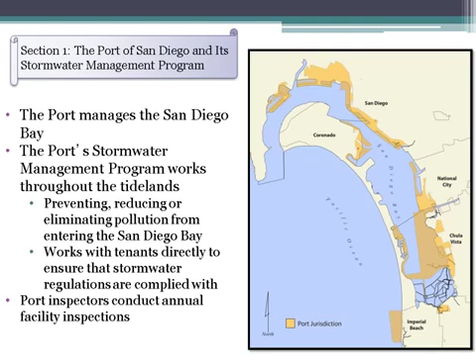Section 2: Stormwater 101. Did you know that the sewer and the storm drain system are two separate drainage systems? We'll start with the sewer system first. The sewer system pipes take all the water from inside a building, like from toilets and sinks, and drain the water to a treatment facility where it is treated and cleaned before being released into the ocean.

The storm drain system, on the other hand, collects all the water from outdoors, such as rain and other non-stormwater discharges, also known as urban runoff, and sends it untreated to oceans and waterways. Since there is no treatment, things like trash, pollution, pesticides, pet waste, bacteria, and other hazardous materials also get carried into storm drains. Everything that goes into a storm drain doesn't just disappear.

If you follow it, you will see it in the oceans very soon. That's why it's so important to prevent any type of discharge and debris from getting into storm drains.

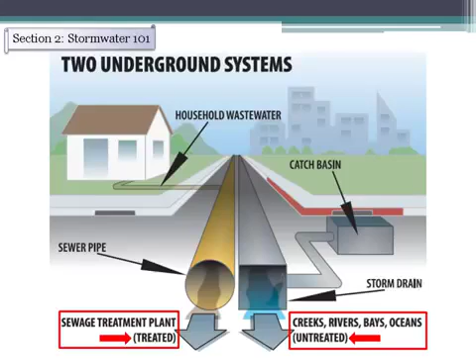Urban runoff is considered the biggest contributor to coastal water pollution. Heavily polluted urban runoff that enters storm drains can result in a variety of issues, including beach closures and drinking water contamination. This can put a community's health and natural resources at risk.

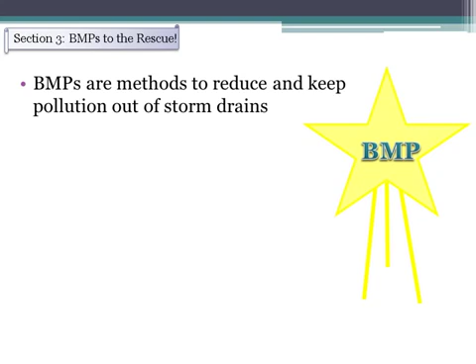Section 3: BMPs to the rescue. The amount of pollution in waterways and oceans can be minimized when people follow pollution prevention actions, such as disposing of their trash properly. Best management practices, or BMPs, are pollution prevention techniques for stormwater. BMP is a term used in the stormwater field, referring to techniques or activities selected to reduce and keep pollution out of storm drains.

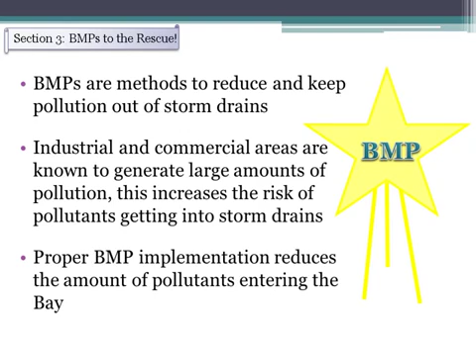Industrial and commercial facilities are known to generate large amounts of pollution. This is why the use and maintenance of BMPs is critical, as it allows for a reduction or elimination in the amount of pollutants entering storm drains and neighboring waters.

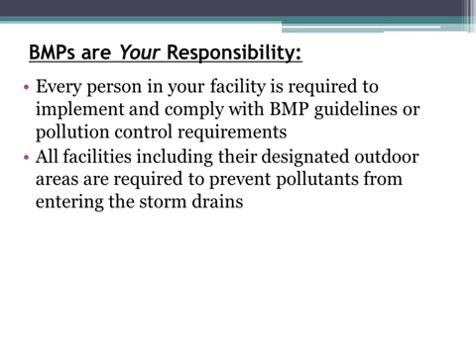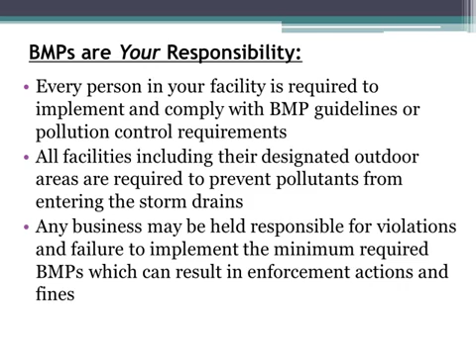Did you know that you are also responsible for BMP implementation and maintenance? Every person in your facility has a responsibility for complying with BMP guidelines or pollution control requirements. All facilities, including their designated outdoor areas, are required to prevent pollutants from entering the storm drains. Any business may also be held responsible for violations and failure to implement the minimum required BMPs, which can result in enforcement actions and fines.

Now that you have had an introduction to stormwater protection, we'll dive into the list of minimum required BMPs that must be followed at your site. The General Operations and Housekeeping section consists of measures designed to keep your facility clean and properly maintained.

Conducting routine inspections of BMPs and stormwater drains means checking as often as needed that BMPs are constantly in place and functional at your facility. If you notice a BMP that is constantly lacking every time you inspect it, it may be time to increase your routine inspection of that BMP or fix how that particular BMP is being implemented.

General housekeeping BMPs also include keeping outdoor areas neat and clean while sweeping to control for dust and debris so that trash does not get carried away by wind or rain to nearby storm drains.

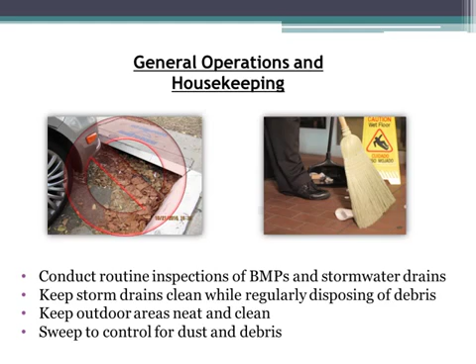Non-stormwater management BMPs are BMPs that prevent non-rainwater discharges from getting into storm drains. These BMPs include having spill response materials available at the facility in case spills do occur, and making sure to clean and sweep up the spill immediately. The second BMP is keeping your facility clear of illegal discharges, which are essentially anything that is not stormwater, and keeping your facility clear of illegal connections, or any connection to the storm drain system that conveys an illegal discharge.

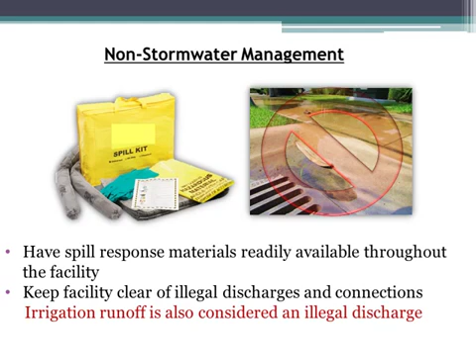The Outdoor Material Storage BMP section describes how to properly store and dispose of materials kept outside. The first BMP is properly disposing of hazardous waste, meaning not throwing hazardous waste away in the normal trash cans or dumpsters. Instead, to dispose of hazardous waste, you would need to either take the waste to a specific disposal site or call a hazardous waste company to come pick up your waste so that they can dispose of it properly.

Next is making sure outdoor storage areas and materials have an overhead cover or are placed within secondary containment, which is something that can contain a spill or leak. All stored materials need to be properly sealed and labeled. It is also important to minimize outdoor storage areas as much as possible. If storage items are scattered along a big area, you should consolidate the area by moving the materials closer together.

The Outdoor Parking BMP addresses keeping parking areas neat, clean, and free from debris or discharges. Regularly sweeping parking areas means often enough so that your facility's parking lot is always neat and clean. The Outdoor Drainage from Indoor Activity BMP makes sure that debris from your facility stays indoors.

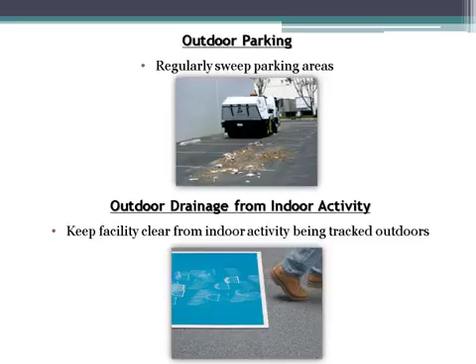Waste handling and recycling BMPs are important as they directly prevent trash and debris from getting into storm drains. These BMPs include making sure waste containers do not overflow. This means disposing trash from waste containers completely inside the dumpsters.

If dumpsters are full, do not leave trash bags by the side of the dumpsters. Birds can peck open the trash bags, spilling the contents all over the floor. If dumpsters at your facility are always full, this may be an indication that your facility needs to schedule a more frequent trash pickup schedule or rent more dumpsters.

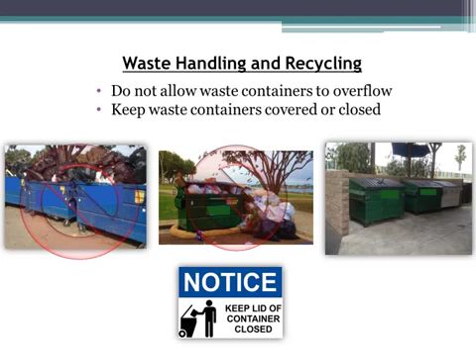Education and training is also an important BMP. Tenants must keep record of which employees have conducted training. The easiest way is through an employee training record, also available on the Port's website. From the Port's perspective, the training you are receiving through this presentation also counts towards employee training.

It should be supplemented with a walkthrough of the facility's specific BMPs. Vehicle and equipment BMPs include conducting preventive maintenance and checking for leaking fluids on all vehicles and equipment before they might start to leak or break down on site.

The second on this list is minimizing, capturing, containing, or treating all waste and wash water that you use. Capturing used wastewater can be done with a water vacuum, as seen in the picture on the right. If your facility does not have one, there are many companies who provide water capturing services. Make sure the company you hire for this and any other service knows about stormwater regulations to avoid citations.

Containing areas where wash water is being used will prevent it from entering a storm drain, but it is also your job to properly dispose of the captured water. An example of properly disposing of contaminated water is disposing of the water in the sewer system. A sewer discharge permit may be required for the discharge, so check with your local agency to verify.

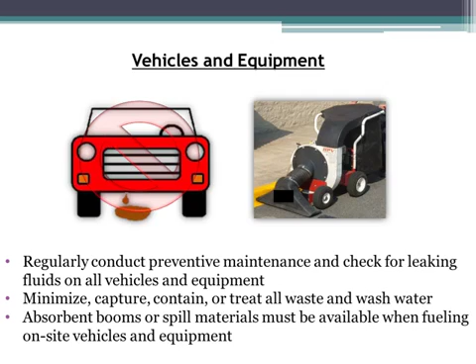Last on this list, absorbent booms or other spill materials must be available when fueling on-site vehicles and equipment in case of a spill or discharge.

Overwater activity BMPs prevent discharges and debris from spilling into the water. These BMPs apply to maintenance repair projects on docks, piers, and walkways found directly above water. Water booms with nets should be used to remove debris, and wet vacuums should be used to quickly capture debris from overwater maintenance activities. Keep in mind that some maintenance repairs require approval from the Port.

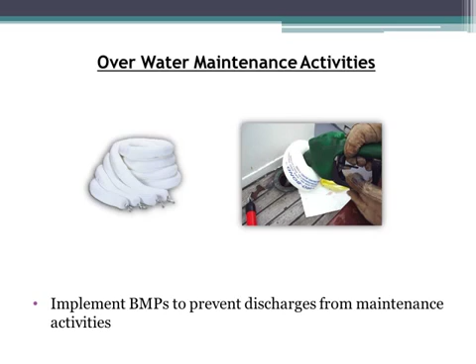Outdoor activity and operation BMPs requires that your facility's outdoor areas be free from spills and debris. It also requires capturing, containing, or treating all wash water.

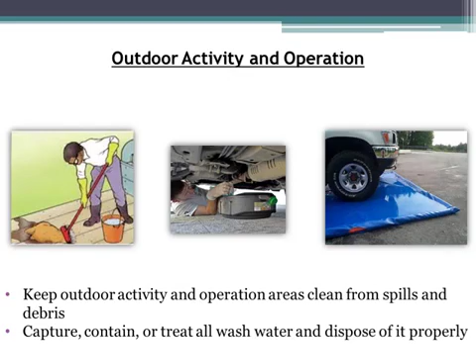The last BMP is a Stormwater Pollution Prevention Plan document, or SWPPP. The SWPPP identifies the activities occurring on your facility and the BMPs your facility will implement to prevent pollutants from leaving the site. Please be aware that only select facilities are required to have a SWPPP. If you are unsure, ask your employer if a SWPPP is present at your facility.